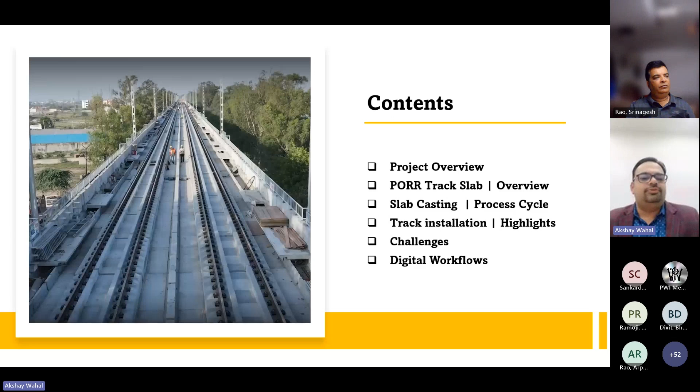This project was first of its kind, as you all know, sanctioned by the Government of India. It is the first regional rapid transit system with an operational speed of 160 kilometers per hour, designed for 180 kilometers per hour.

For L&T, the scope was basically manufacturing, supply, installation, testing, and commissioning for the entire project. Of course, design was predominantly not in our scope. It was done by a dedicated design consultant, but L&T did a few elements of design, which I'll explain in more detail in the upcoming slides.

The overall project cost, about four years ago, was around 30,000 crores. I don't have the exact figures now, but it must have escalated. The target was that travel time between Delhi and Meerut would be limited to 1 hour, which is a phenomenal target to start with. The project consisted of approximately 14 kilometers of corridor in Delhi, out of which 11 kilometers was underground, around 25 stations, of which 4 were in Delhi, and an estimated ridership of 8 lakh daily, which is phenomenal.

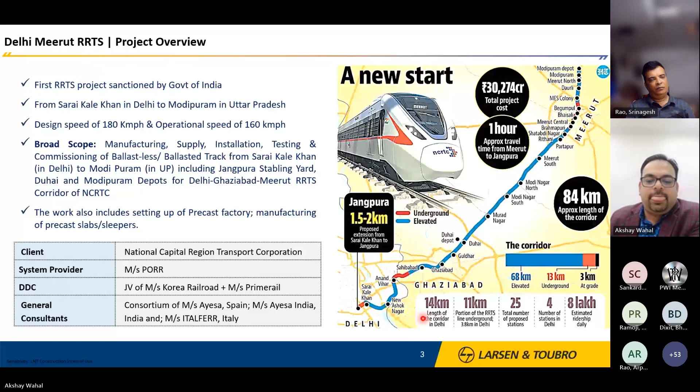This slab track system was chosen for this project because of the advantages any precast slab track system offers. The entire slab is 5 meters long, with a fixed rail inclination and fixed gauge, and for this considerable length, the track tolerances are also very controlled and precise. Whether it's a straight or curved section, you can install these rail seats according to your geometrical parameters, so that at the end of the day the track alignment is installed to a very tight tolerance, crucial for any high-speed project of this kind.

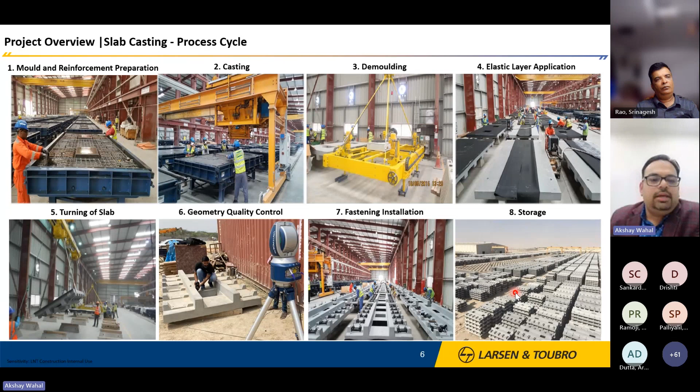This is a short video of what I explained in a bit more detail.

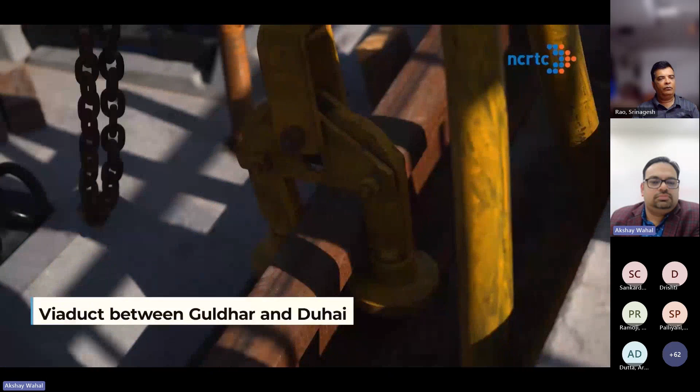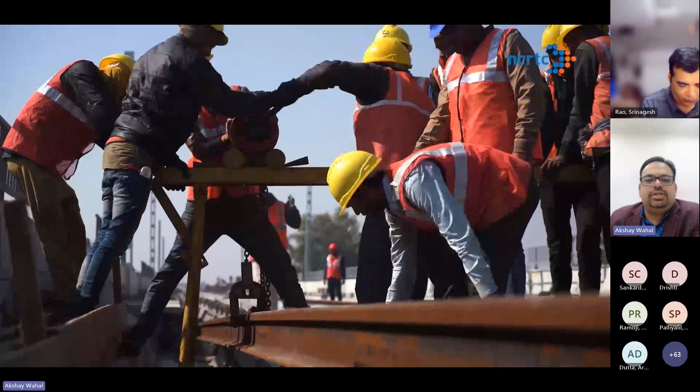So this image is from our very first installed track, where we were learning this technology. We were trying to implement this technology, trying to develop new tools, and it has come out quite beautifully, I must say.

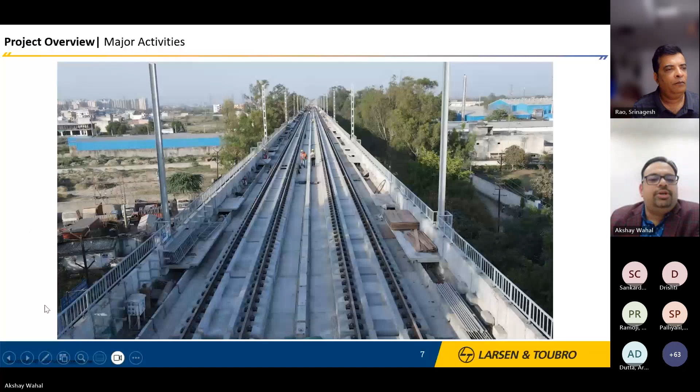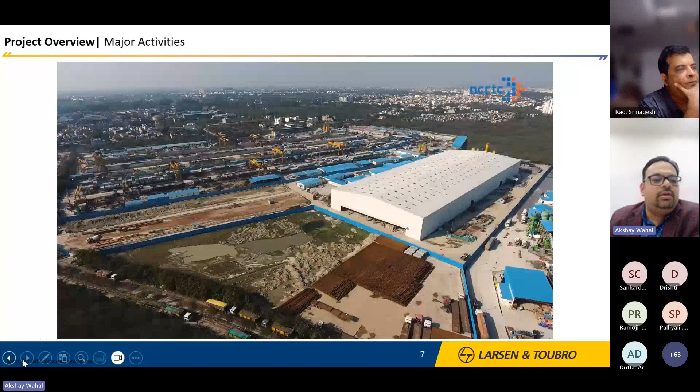So what you saw in the video, I would like to explain a little bit here. This is a specially designed gantry that you see - I'm hovering my red laser on top of it. This was designed by L&T and implemented by L&T for the first time for this kind of precast slab track installation.

This crane that you see over here has a very special equipment called a grabber. This grabber can lift multiple slabs, 3 to 4 slabs in a single go, and try and lift it and put it on top of the viaduct.

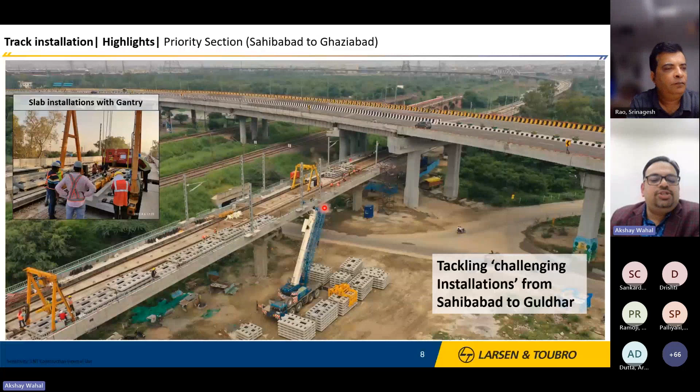Look at the kind of challenges from the safety point of view, from the quality point of view, from the logistical point of view - lifting all these slabs, putting them in the right place, running our gantries, running our equipment, running our machinery. But in the end, when you look at the fully installed system and the right quality, you forget about all these challenges and just enjoy the moment of the train ride. So that part was for the enthusiasts.

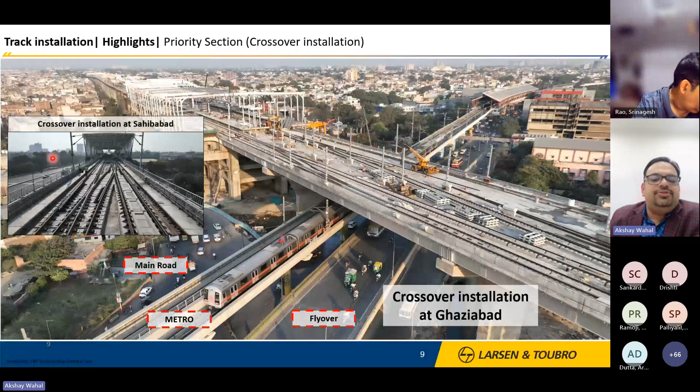These spindles allow us to horizontally and vertically adjust the slab track within the correct tolerances, so that whatever gap you see at the bottom can be filled in with self-compacting concrete, or in-situ stitching concrete, which is about 10-20% of the overall concrete required. Approximately 80% of the concrete is done in precast.

The depot construction was also a part of L&T's scope. This was entirely ballasted on the outside, and within the workshop it was completely ballastless, with a typical kind of plinth tracks or embedded tracks that we usually have in any metro corridor.

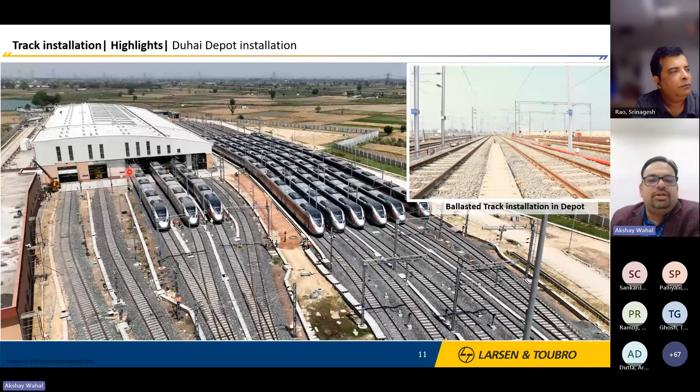This was another interesting element of the project, wherein we had to provide certain noise and vibration mitigation measures. The survey for the noise and vibration was conducted by the client, and they specified which type of mitigation system had to be provided.

Just to give a brief on noise and vibration considerations - whenever you have a railway corridor, you have a train rumbling on top of the track, with steel wheel in contact with steel rail, which generates vibrations that pass through the media, either a structure or soil, and can affect adjacent buildings.

These vibrations directly vibrate the building beside the track. Sometimes, because of the vibrating building, the doors and windows also start rattling, which is called secondary groundborne noise. And of course you have direct airborne noise - when the train is running, because of various machinery inside it and its aerodynamics, direct noise may emanate from the rolling stock.

These aspects were also addressed by the client, and essentially what they asked us to do was to provide an isolation layer below the slab track, so that all the vibrations could be decoupled. I'll talk about the isolation layer in the next slides.

To give you a bit of a feeling about what noise and vibration is, and how these vibrations can perceptibly affect human annoyance levels, here is a short video from our partners, Getzner, who supported us technically on this project.

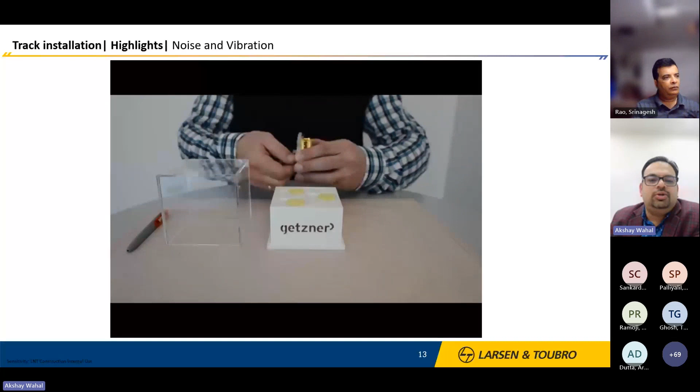This is a very simple tool they demonstrate with, showing how noise and vibration really works. It's just a musical instrument which they place on top of a hard support, a plastic support.

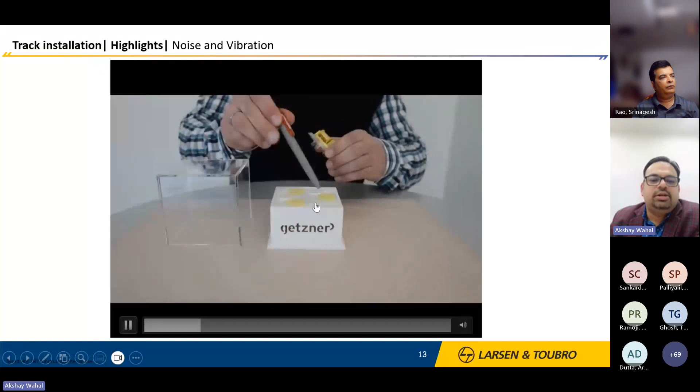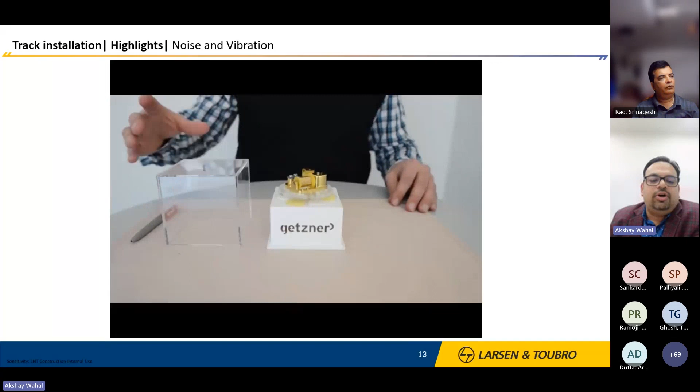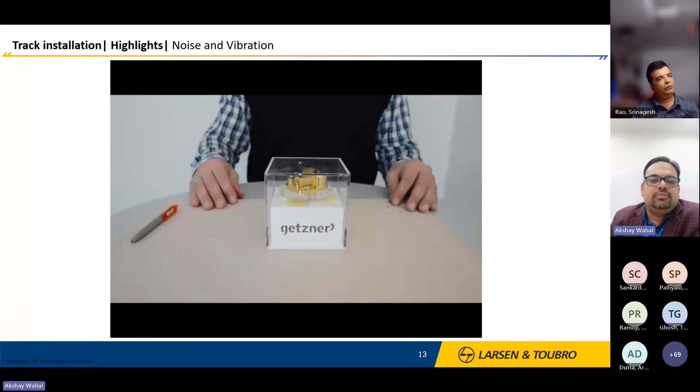Now, because you are able to hear the vibrations, the volume has increased. But now when you cover the airborne noise, the volume has reduced perceptibly. Again, it has increased.

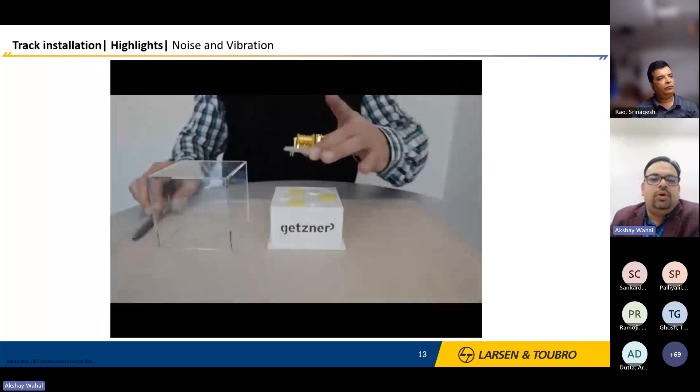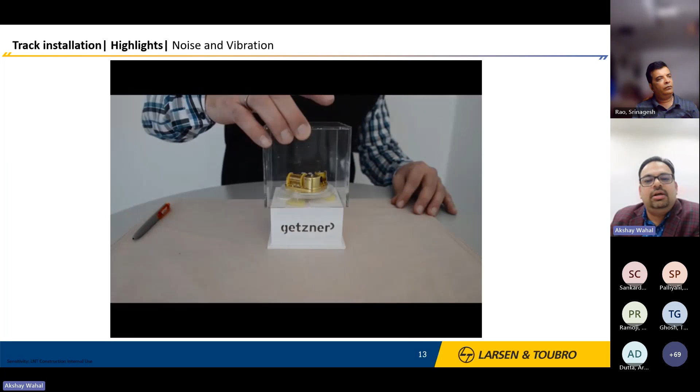Now they place it on the isolation layer, or the soft layer, below this instrument. Basically they're decoupling the vibrations, and you can perceptibly see the volume of this instrument is reduced. Now, coupling the vibration isolation with air isolation, you can hardly hear anything. This is the basic concept of noise and vibration in the railways sector.

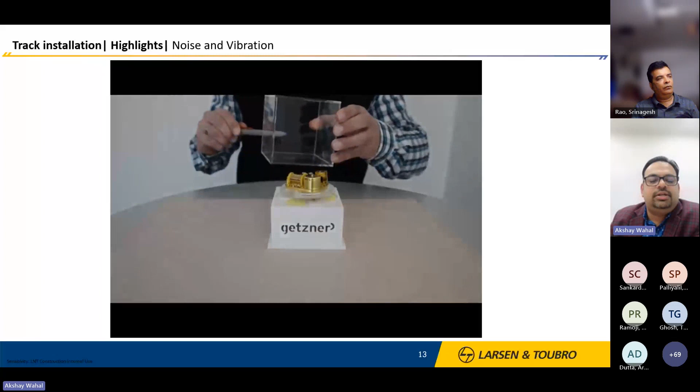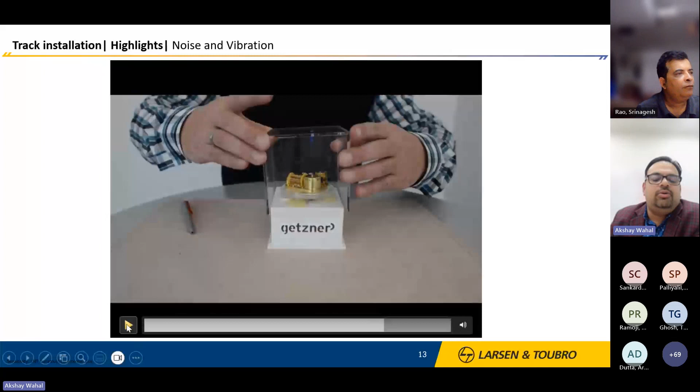Now this is an interesting part - I'll pause here for a minute. What this person does is connect a pin linking the vibrating element with the structure. In technical terms we call it a sound bridge, and just see how, by simply touching a needle, the volume perceptibly increases.

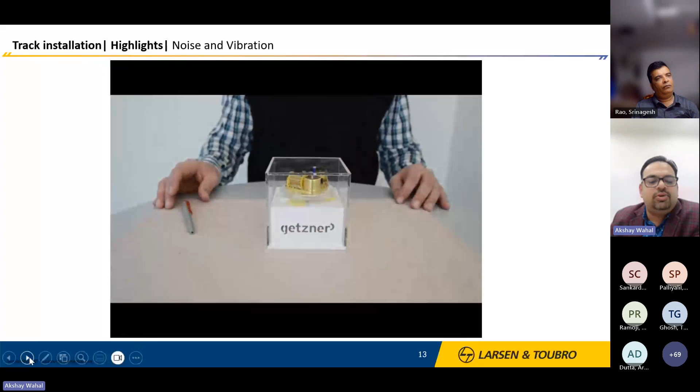This is a very crucial part in the design and installation of any mass spring system. You have to decouple the vibrations as well as the noise, but in our scope on this project, only the vibration decoupling was required, not the airborne noise.

Now, how we did this was using two types of mass spring system elements. One was an elastomeric layer below the slab track, and the other used steel elements embedded into the slab, which consistently lift the slab up by approximately 40 millimeters. So the slab is hanging in air, and this has a spring element.

In the elastomer, the spring is provided by the microcellular structure - it's something similar to rubber, but it's actually a different chemical material altogether. Here it is a steel spring, which isolates the slab track vibrations emanating and going into the ground.

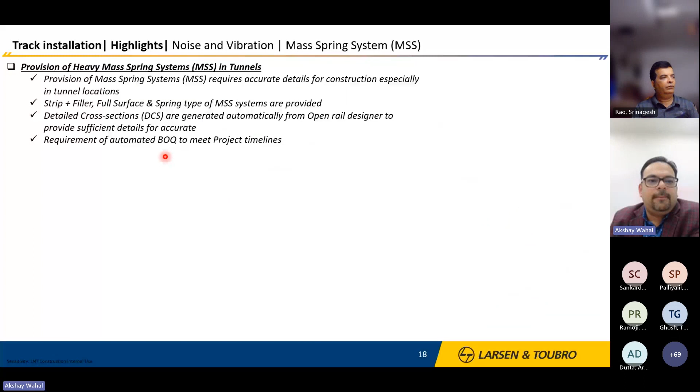Then this yellow layer that you see, this is the elastomer based mass spring system. This is the strip plus filler element, wherein you have a slightly stiffer element, the blue one or the black one, and very soft yellow filling layer. The blue layer is a single consistent layer across the width, which we call a full surface element. And on top of this, then we do our reinforcement caging and cast our base concrete.

If I go back to the section, the photo that you see with the reinforcement is in this area. So coming back, the reinforcement is quite dense. And as you can see, even a minor error in the reinforcement calculations can lead to a lot of abortive work and rework, and could lead to a loss for us as an EPC contractor, where we have to be very competitive in our prices and we have to do everything first time right.

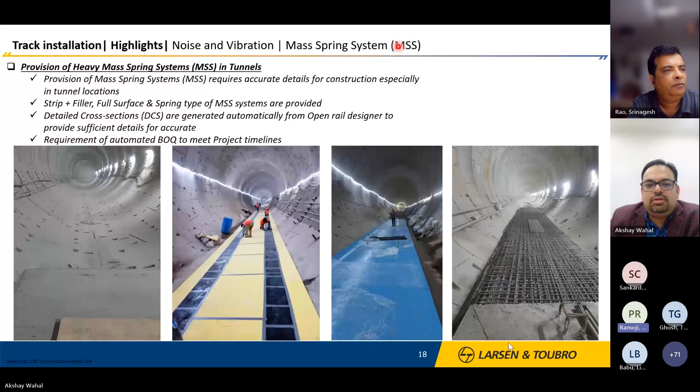Coming to the next one, we have a question from Uday Avradi. He is asking, on sharp curves and horizontal transition curves, how are the precast sizes optimized? Yeah, that's a very interesting question. That was another challenge that we faced in this project. So if I show you how the slab track is managed. You already mentioned that in curves also you have used the straight precast slab only, right? No, not the straight one. So basically, this is a typical slab track element which is used in about 70 to 80% of the project.

And the tricky aspect is to have a slab distribution list. So for every chainage, you must define that here this 5 meter slab has to come, and so on. And when the transition is starting and you have a very sharp circular curve, there are two ways of compensating that curve, either by reducing the length of the slab. So we have a possibility to manufacture these slabs with 3, 4, 5, 6, and 7 rail seats. So you can have anything varying from 2 meters to 5 meters. And with a shorter segment, you can even lay it in a versine in a relatively flatter curve.

But if the curves are very sharp, then there is a possibility in the mold itself that you can shift the mold in a manner that it will compensate for the curve geometry. And a particular curve geometry, we call that the arc rise of every fastening system. And that geometry can tackle a curve from a particular radius to a particular radius.

So it is very important and critical that the slab distribution list and the plan of these slabs are prepared well in advance of installation. Because if you reach that particular site and then realize that this type of slab is missing, that will throw off the entire construction progress. So it is a big challenge, in fact.

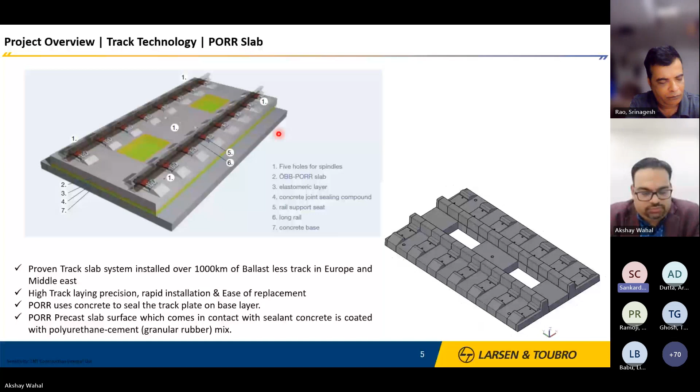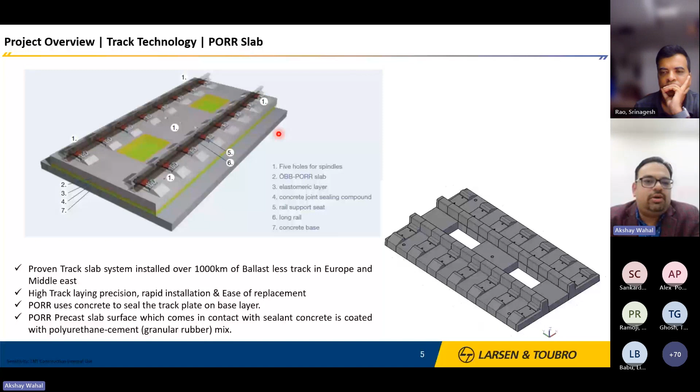For the fastening, you first model a fastening, and then all the components you just copy, but it's only the slab sizes and dimensions that would vary, right? Yes. Every slab element is unique. Suppose the standard slab element is 5 meters; that will continue, and then you will have special shorter and curved slabs also. All those details are modeled in the digital twin. So this was a specific requirement of the contract? Yes, this was a specific requirement of the contract. Great, thanks.

This is really detailed. This is probably the most detailed digital twin till date in India, as of now. Yeah.

And in this context, I have a question. What is the differential in separation thickness between the two slabs? You have minimum and maximum. So this can vary, but minimum I think is about 270, 275 millimeters. This gap that you see between the two slabs, right? Yes, yes. Yeah, approximately 270 millimeters.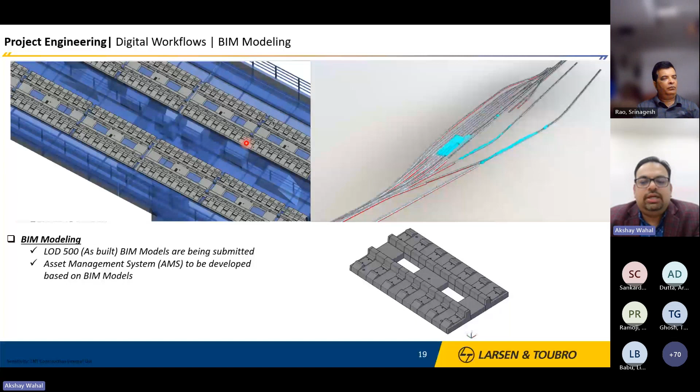So there are no deflection issues? See, the deflection issue will come when you have a mass spring system below the slab. And for that purpose, let me show you the cross section. So you're talking about the gaps in the dark gray section. Yes. Do you see my pointer and the cross section?

Yes. This layer that you see, the white layer, the mass concrete is approximately 300 millimeter thick, and you have an elastic material below. So this material will bend, of course. And this concrete layer, approximately 300 long, is made continuous, so that at the ends there is no end rotation effect that comes into play.

Okay. Next question is from Thomas Cornelay. He's asking what is the design axle load and what is its design life? So design axle load is 17 tons, and design life is I think about 100 years.

Next, it's again from Shankar Dev. Did you have input sectional operating speeds in curves in advance to decide on a balanced applied cant? So the alignment that was done for this project, we started off by getting the centerline alignment, then we broke that into up and down.

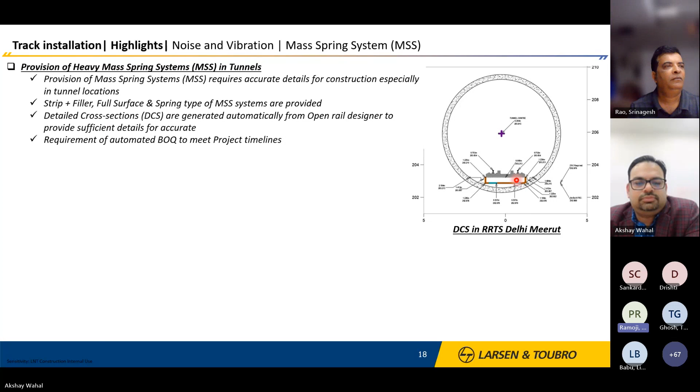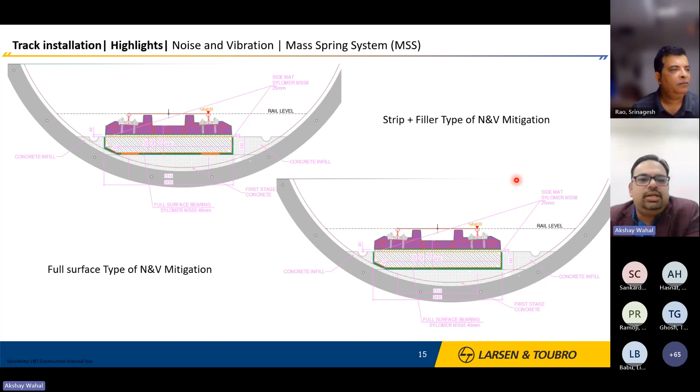And I got one more question from Siva Akasapu. How are precast slabs managed in canted geometry? That arc rise thing, right? No, arc rise is for curves. Canted geometry, you can see in this photograph, this is in a curve location. And on this side, the in situ concrete is slightly thicker than on the inner side. So basically we manage this by the in situ stitching concrete, which tapers down and provides a super elevation. Okay. The precast slab is 160 millimeter thick consistently. Siva, is your question answered? Thank you. Yeah.

And just to add on the arc rise, here you can see that there is a slight amount of arc rise in these slab elements. They are slightly curved, like this. So this was also a part of the manufacturing process. Yes.

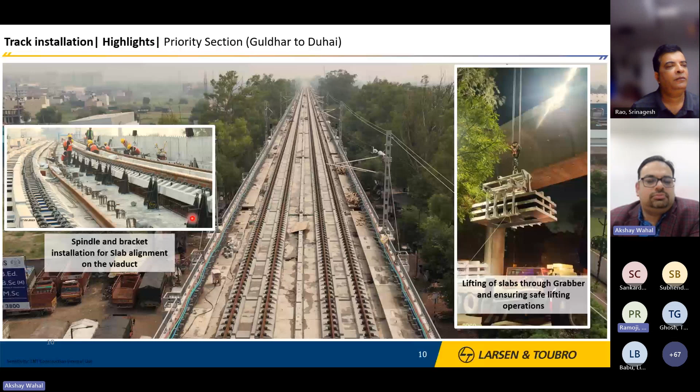Okay, any more questions left? I have one question. What is the headway, Akshay? Train headway minimum. Headway, I need to check. I don't have that by heart right now, but I'll have to check in the operational plan. Just curious, that's all. But it must be 3.5 minutes, I believe. At least if it is not there right now, eventually maybe by 2030 or 2050, they're targeting at least this much.